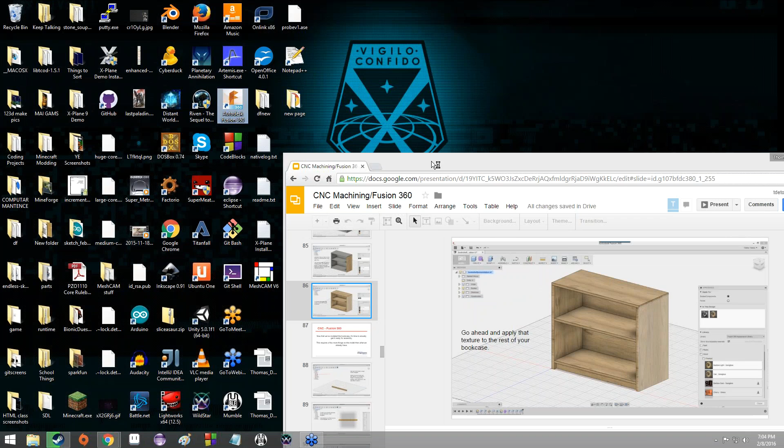Anybody do anything interesting this weekend? Okay. Archery shoot. Nice. I like archery. I'm no good at it, but I like it. I took a couple of classes, and actually a couple of my friends have bows, so we go out shooting sometimes. Robotics competition. Oh, you know how you did? Nice. Congratulations. It wasn't Amazing Mechatronics, was it? Or NCSO, North Carolina Science Olympiad? Only reason I ask is because I was at that. Oh, okay, FIRST Tech Challenge. Oh, yeah. Yeah, I helped out a little bit with that at the community college in Charlotte before I moved out here.

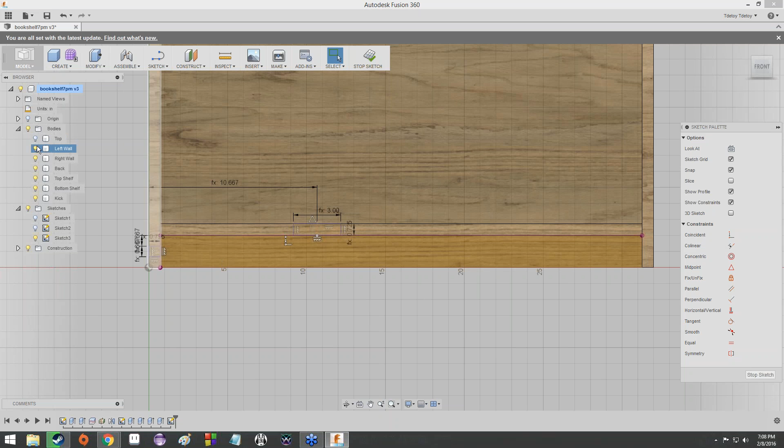Because like we were saying last time, there was a bit of an issue with what we'd had so far, and that is the fact that regardless of whether or not the bookcase looks complete, we don't actually have any means of affixing everything to everything else on the bookcase. In other words, we don't have any holes for screws or anything like that, so what we're doing is we're creating these tabs that we can then use to assemble it all together like a jigsaw puzzle, or you know those flat sheets of metal that have designs punched out on them, and you separate the different parts and you bend them, and then you put together like a model or something.

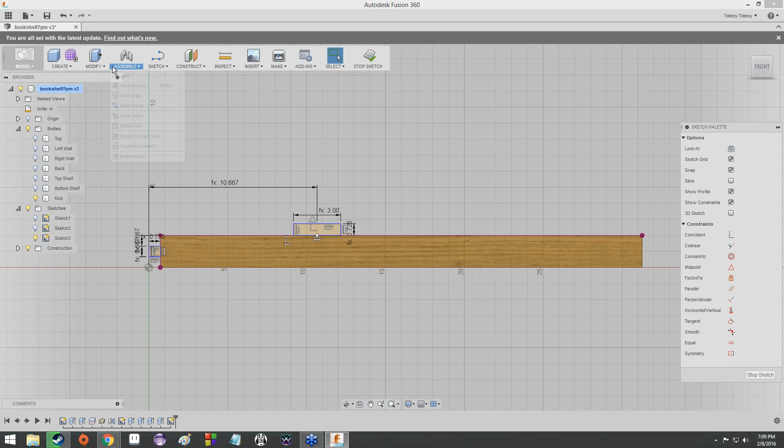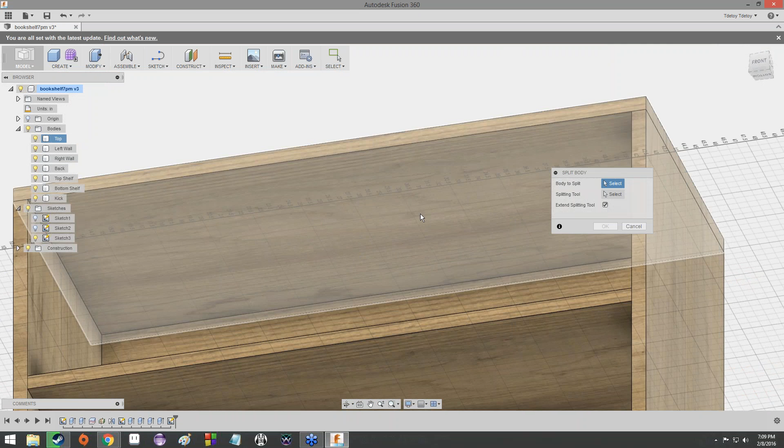Somehow your whole entire bookshelf is one entire body. Ooh, that'll be a little bit more time consuming to fix. It's possible. So what you can do is under Modify, you can split bodies like we were doing in the video. And basically when it asks for planes to split the body along, like the splitting tool, you can select, for instance, let's say you wanted to separate the top from this sidewall here. You could select the bottom face of this top. Let me go ahead and rotate it downwards. If you selected this face here, it would use it as the plane in order to separate these two bodies.

And then you could just do that with all of these. So you would split this sidewall off from the back and the shelves by selecting this face. You would separate this shelf from the back by using the face on the back. You would separate the kick plate from the bottom shelf by using the bottom face on the kick plate or on the shelf. Things like that. Does that make sense? It'll be time consuming, but it will be possible to do.

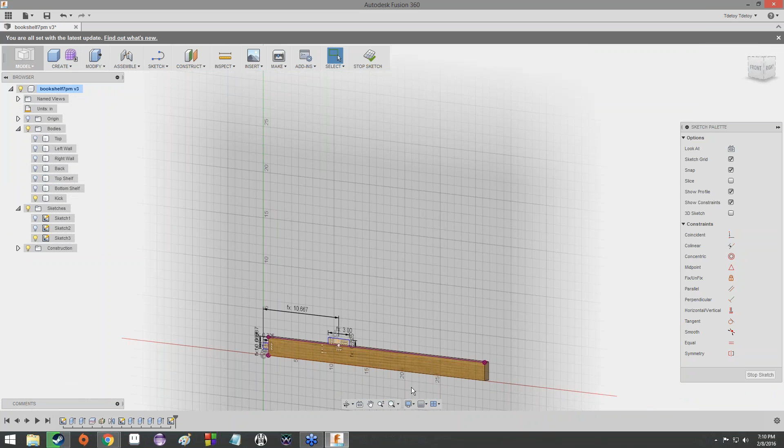Okay. So, in the meantime, though, show of hands for everybody who has their rectangles drawn and dimensioned out like I do here. I don't exactly remember if we managed to get everybody on the same page last time around, so I just wanted to double check. Yeah, that's going to be the tricky thing about this, because you select the body, which would be the entire bookshelf. We'll figure that out piece by piece, but we should be able to get everything separated by the end of class, or after class rather. Okay, we got one hand up, two hands up, three. Raise your hand then if you have the rectangles drawn and you're just missing the dimensions for them.

Okay, raise your hand if you don't have the rectangles drawn at all. Okay, that's okay. No big deal. So in order to get started, this might be a little bit more difficult, Micaiah, since everything's a single body for you. We'll just spend some time after class getting your bookshelf ready and maybe getting you up to this point again, so that you should be good to go for next class.

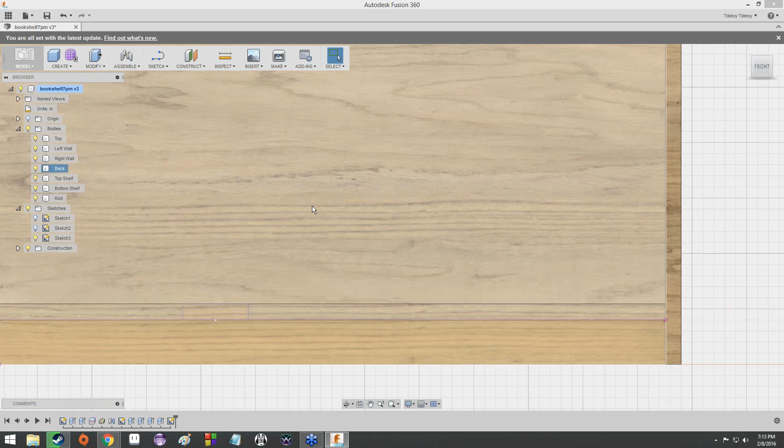So hide everything except for the kick body. So you just have the kick plate right here, which is the bottom front-facing plate. And then you're going to create a sketch on the front face of it.

Once you've created a new sketch, you're just going to create a couple of rectangles. You can just put them arbitrarily anywhere. It doesn't matter where exactly, just as long as there's one on the side and one on the top, because we're going to dimension those properly in a moment. And then just raise your hand once you've gotten the rectangles drawn, then we'll go from there. Okay. We got one hand up.

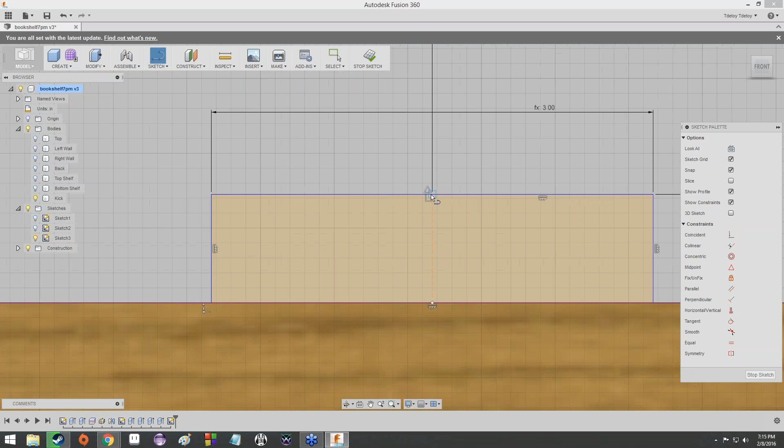All right, so if you have the rectangles drawn, the next thing you're going to want to do is go to Sketch and Line. What we're going to do is sketch a line directly down the center of these rectangles. And the way you can tell you have the center is you see how I've got this triangle right here? Let me zoom in on it. It doesn't make it any bigger. Well, anyway, there's a triangle there.

That triangle means midpoint. Literally the middle of this line right here on the top. So move your cursor around on that top line until you find the midpoint. There should be I think a blue triangle that appears. Find that midpoint, click, and then create a line straight down. Do the same thing over here. Well, actually, no, you don't have to do that over here. You just have to do it along this top one here. So create that midpoint line.

Now that line, when you first draw it, is going to be blue. And it's going to split this up into two rectangles. As you see, if I mouse over this, it's all one rectangle. What we need to do is turn that line into a construction line, so it is not part of the illustration. Like you might have it like this. See, now I've got two rectangles and this blue line going straight down.

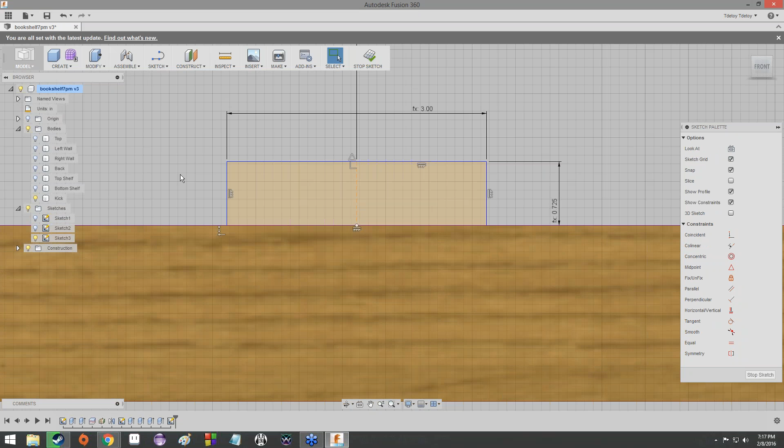If you click on it, though, you'll bring up this little menu on the right-hand side that says Sketch Palette. There's this top option that says Normal/Construction. Click that, and it will turn into an orange dotted line, which means it's a construction line, which is exactly what we want, because we're going to be using it for measurement purposes, and it's not actually going to be a part of the final product.

All right. Now, ideally, you should have two rectangles, one on the side, one on the top. You've got a construction line down the center of the top rectangle, and everything's just kind of sitting in place. Now we got to dimension them. So go back up to Sketch, and then down to Sketch Dimension.

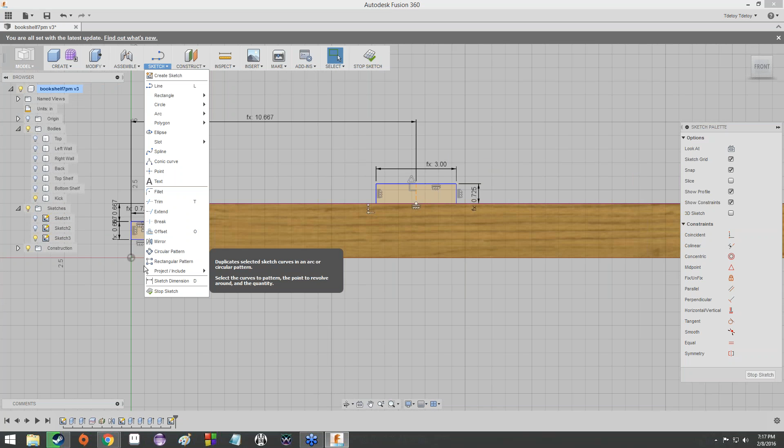So the first thing we're going to do is dimension the width of this side tab. So dimension just this line on the left-hand side right here, the one that I have highlighted. Bring it out, and that dimension is going to be kick divided by 3.

Once you have that done, dimension this top line here. So the top line of the left tab, that's going to be dimensioned with ply. So now we have the width and the length of this side tab, which is great. That's what we want so far. Now we have to get the distance of this side tab from the top of the kick plate.

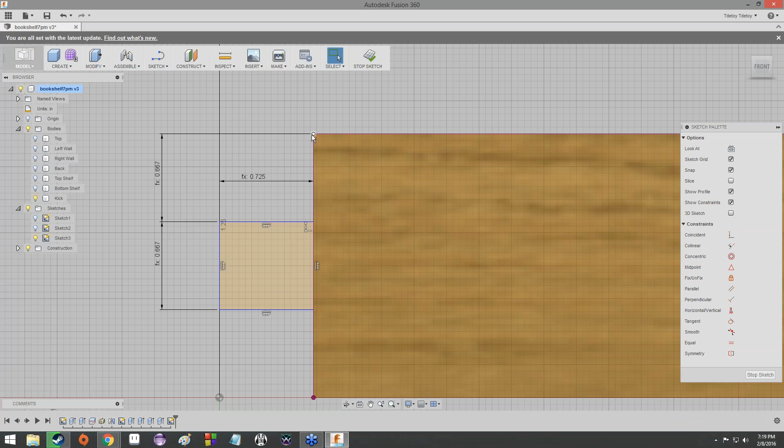So what you can do is, you notice that at the intersection of these two lines, the side line and the top line, if I put my cursor over it at that corner, a dot appears. Click on that dot, and then there should be another dot at the corner of the kick plate. Click on that dot.

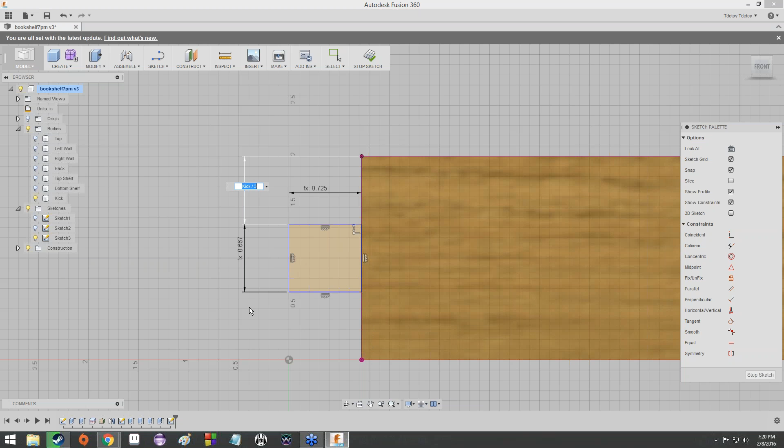So it's going to be the distance from here to here. Then pull it out sideways so that we know it's going to be the vertical distance, not the horizontal distance, because then it'll freak out. Anyway, this distance is also going to be kick divided by 3. So now we've got 1/3 of the height of the kick plate, which is just empty space, 1/3 of the height of the kick plate, which is the tab, and then the remaining third is on the bottom, right here. Because we're dividing it into thirds, so that works out pretty nicely, right? So there we go. That should be the side tab all dimensioned out.

Once that's done, we dimension the top tab. Now the top tab, the length of it, is also going to be ply. Basically how far it sticks out from the top of the kick plate. That's also going to be ply. No surprise there. All of these tabs are going to be ply, with the exception of a couple, but we'll get there. For right now, though, it's going to have a length of ply.

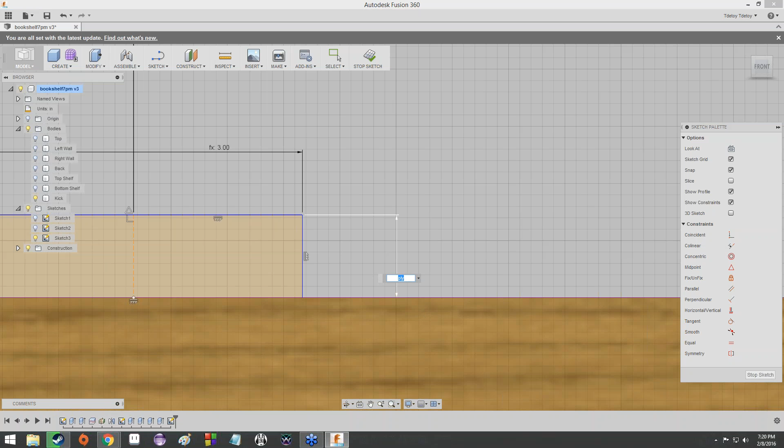And just to clear up any confusion, when I refer to the length of the tab, I refer to the amount that the tab sticks out from whatever it's attached to. So in this case, this way is length on the top tab, and that way is length on the side tab. And then width is going to be the lateral size of the tab. So again, that's going to be the width on the top tab, and then this is going to be the width on the side tab.

It's a little confusing because of the fact that it's relative, but hopefully that'll make sense to you if it doesn't already. You guys are pretty smart though, I think you can pick it up.

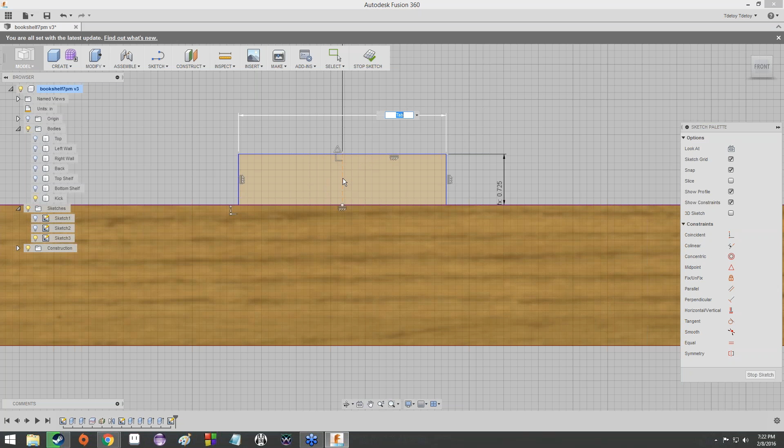So once you've got the length of that tab dimensioned, the width of the tab is going to be tab, conveniently. That's why we created that user preset. Most of the tabs on this bookshelf are going to be a width of tab. And again, because exceptions are fun, there are always going to be a couple of exceptions to the rule, this being one of them. But for now, a pretty safe assumption is that the width of any tab is going to be tab.

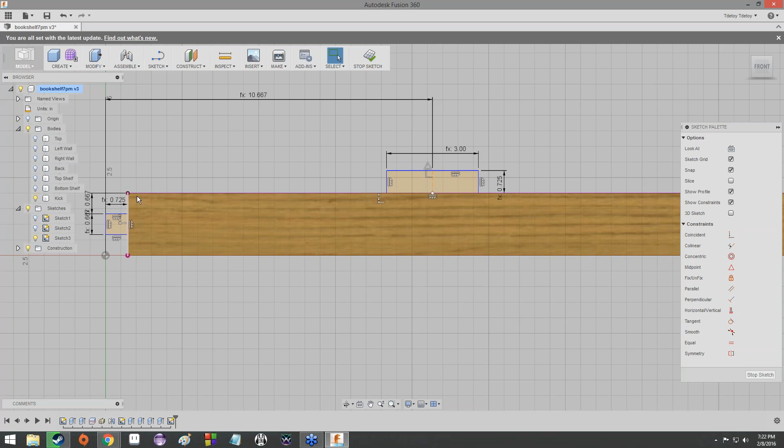Now, that's almost everything. There is one more thing we have to do, though. We have to dimension the distance of this tab to the end of the kick plate. So the distance from here to here. Now, that's not the way we're actually going to distance it. What we're actually going to use is the distance from there to there. So that's why we're using this midpoint construction line, because we're going to use it for sketching a dimension here.

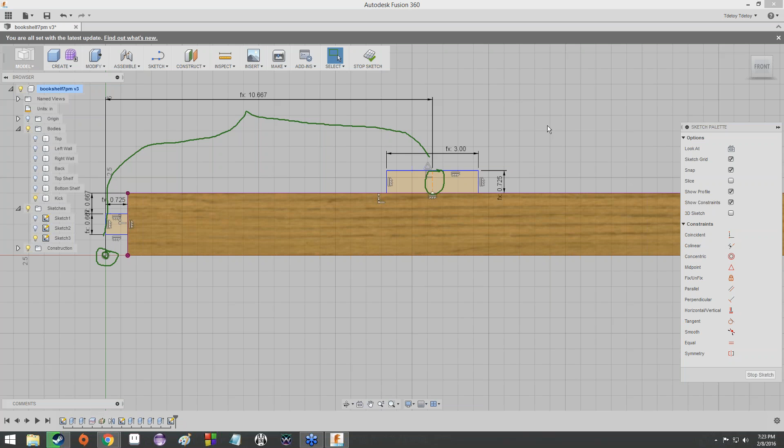So you're going to start at the origin, which as you can see is easily identifiable by its sort of half-filled in circle, or circle filled in by quarters. If you mouse over it, you get a point there. So just go ahead and click on that one, and then you're going to click on the midpoint construction line, which should highlight if it's selectable. So between the midpoint line and the origin, you're going to dimension it width divided by 3. And that should be it. That should be everything you need to dimension for these kickplate tabs.

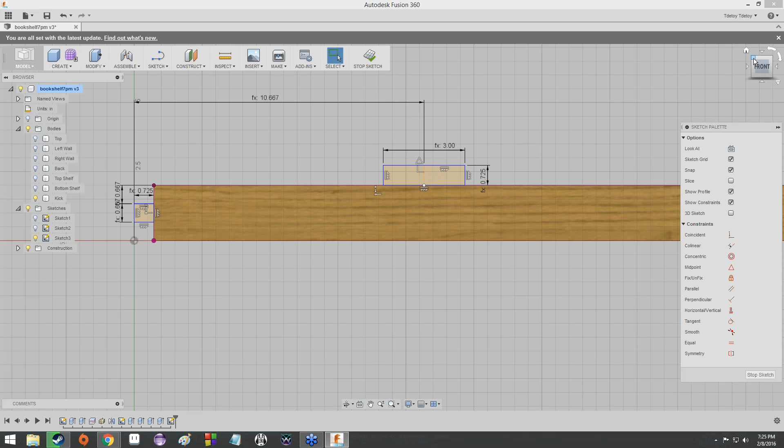So just, again, to get an idea, raise your hand real quick if you're ready to move on to extruding these. Okay, I only got a couple of hands up. All right. Just about everybody. Well, in the interest of keeping things moving, let's go ahead and get started on the extruding. If there's anything you want me to go over again, you can always ask me in the question box. Otherwise, the video will go up on YouTube tonight, so you'll be able to get back up to speed.

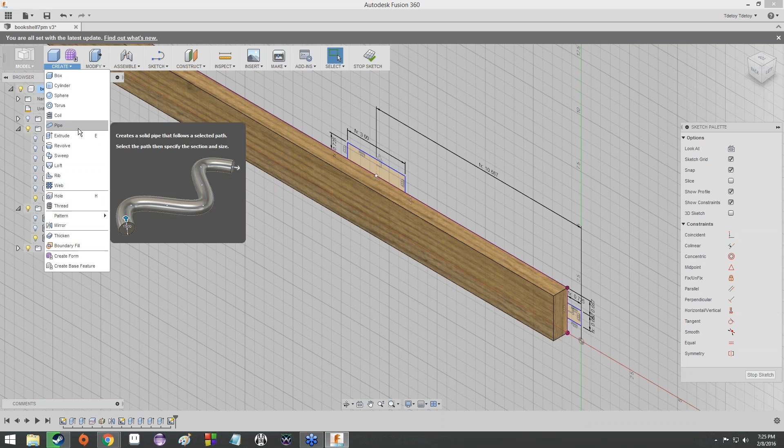All right. So we'll go up to create and then extrude, because that's how we extrude things. And here I am looking at my nice two sketched tabs. And we're going to select both of these because we want to extrude both of them, as one might expect.

So you remember last week when we were creating the shelves and the kick plate and all of that stuff, there was that option to extrude it to a certain distance by selecting To under extents. And that's what we were doing, that's how we would get the shelves extruded to the other side of the bookcase and stuff like that. We would use that particular option.

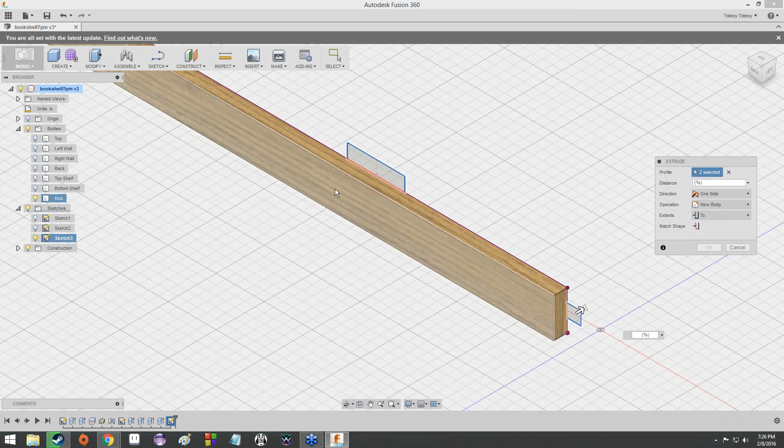We're going to use that again. Now, the nice thing is, To is very good at extrapolating what exactly you mean. So now that we have our sketches selected, we can select To, and then we can just click on this back face of the kick plate. And it will automatically go, okay, so it should go that far, and then it will stop.

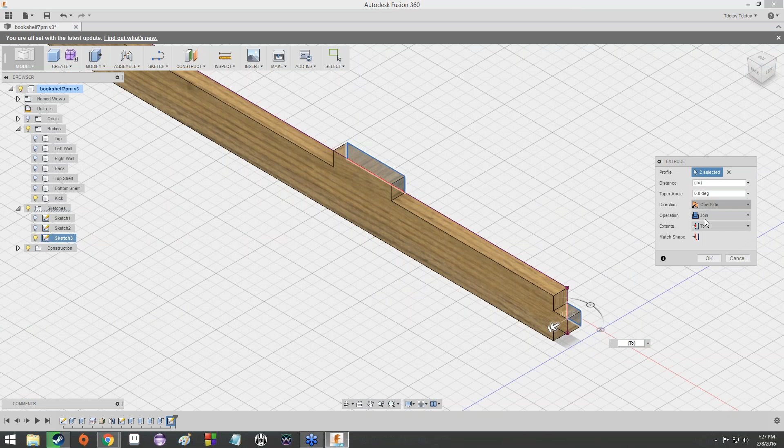So if we look at it from the side, our 2 tabs now are 3-dimensional, which is excellent. That's exactly what we want. And we're going to keep the operation on join for now, because I'm going to show you another way that we can mirror things. Although usually we will select new body like we have before. So we'll keep it on join, and we'll hit OK. And look at that, tabs. Wow.

Although it seems kind of weird that our tabs are really only on one side. So what do you think we're going to do? Many ideas. I'll give you a hint. We used it last week.

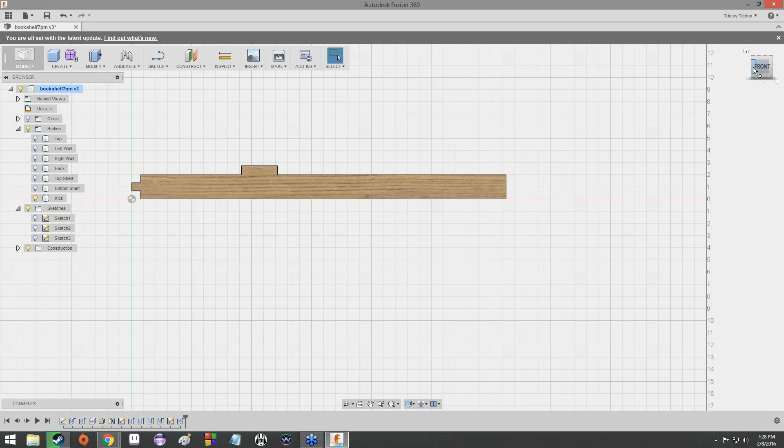Okay, well, we're going to use mirror. We're going to be mirroring these tabs over onto the other side, because it seems kind of like a waste to have to redraw all those things again when we can just have the computer do all the heavy lifting for us. So under Create, down here there's this option called Mirror, which again we used last week, but we meet once a week, it's not necessarily going to be fresh in your head. So go ahead and select Mirror.

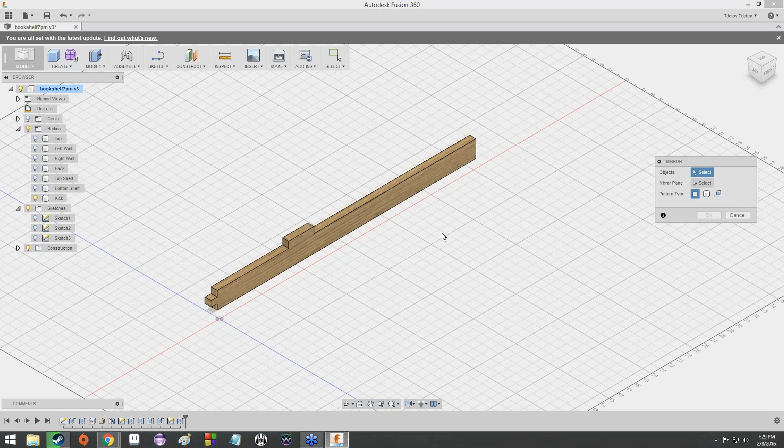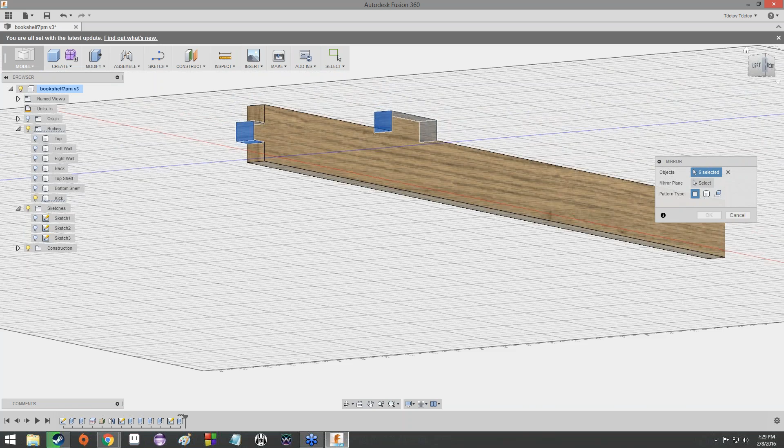So first things first, we select the objects that are going to be mirrored. If we get on to pattern type, we notice that pattern faces is selected, which is excellent. We want pattern faces to be selected. And then we're just going to go through and select the faces on these tabs, not the front and back faces, because those are joined to the entire kick plate. Fusion will be able to extrapolate on those two sides and update the front and back faces in order to reflect that. So I've got the side faces and the top face selected on each of these tabs.

Pretty exciting, I know. And then we're going to have to select a mirror plane. Well, if you remember from last week, we had the foresight to create a midplane when we were mirroring the left and right walls, right? So we're going to use this construction midplane as our reflection plane. So you can either just click on it here in the browser, or you can click on it so you can view it and then select it there.

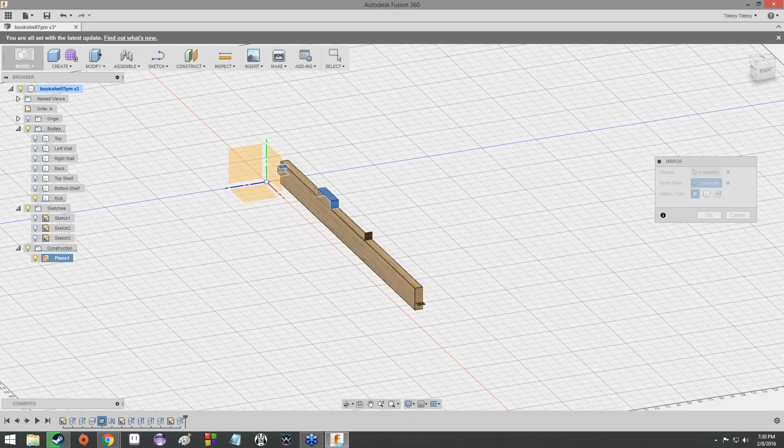Anyway, I've got kind of this weird preview here where there are only a couple of faces showing. That's okay. Fusion 360, when you use faces like this for reflection, it's not exactly the best at giving you a preview. So it's just going to look funky, but that's not a huge deal. If you hit OK, the tabs should appear. And then we'll have a fully tabbed... undo. If anything like that happens, usually the best thing to do is just hit Control-Z and undo it.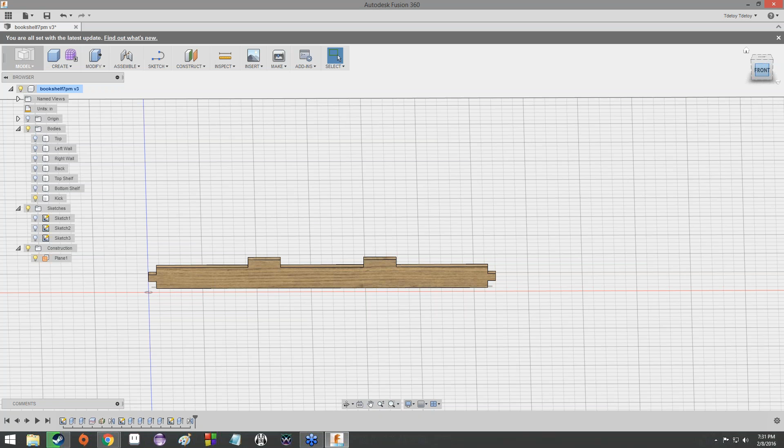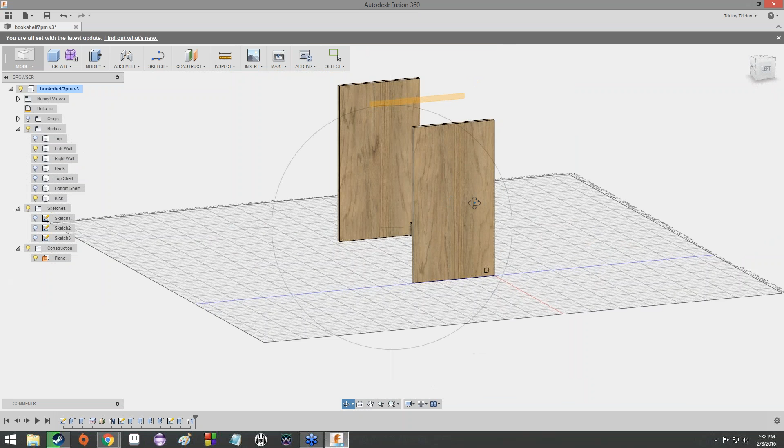Oh, you mean you deleted your midplane? Is that what you're saying? Well, okay. So if it's actually the midplane that you deleted, you can just bring back the left and right walls. Go to Construct and Midplane. Once you click that, then you can click the outside walls of the side walls. So this wall, and then this wall, and it should generate a new midplane for you that you can use.

But if any of you guys happen to delete that midplane, go ahead and bring it back, because we're actually going to be using that midplane a fair amount in the upcoming days. So that you can replicate the tabs on both sides easily, because we're all about making our own lives easier. I mean, that's really the whole point of engineering when you get right down to it, increasing quality of life and making it easier.

Hopefully you guys should have your kick plate tabbed, or at least close to it.

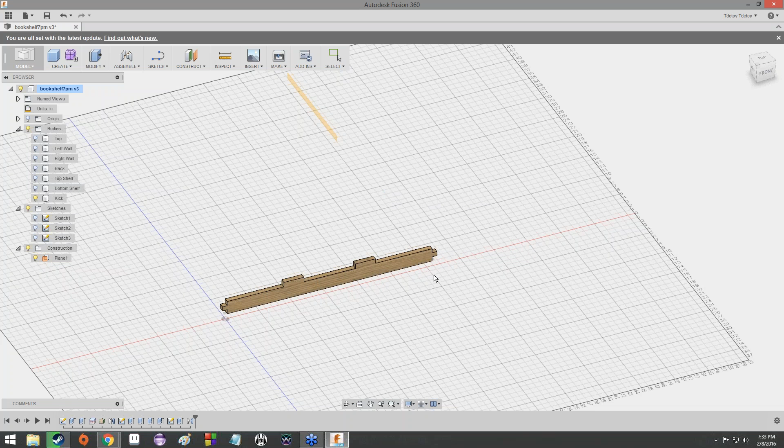Now we're going to tab the bottom shelf. Exciting, I know—try and hold your enthusiasm for the end, though. Let me go ahead and bring that up. Just make sure... make the bottom shelf visible. Part of this is just me talking to myself because I want to see the dimensions. I don't remember them off the top of my head.

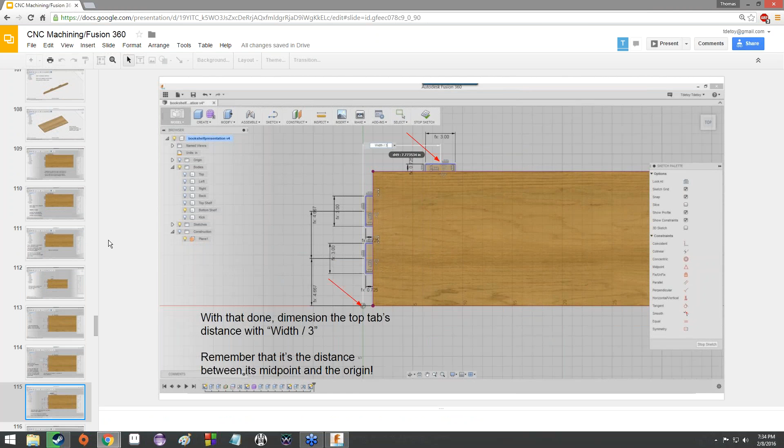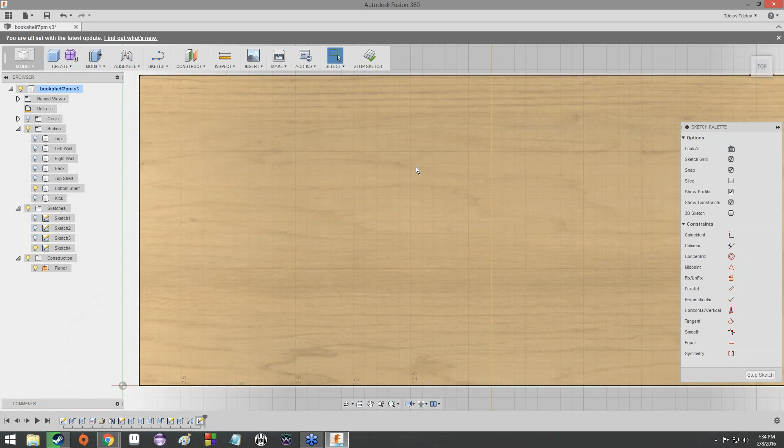Okay, so now that we've got our bottom shelf visible, we're going to go up to Sketch and then Create Sketch on the top plane of the bottom shelf. Let me just verify—yep, I got top on my cube up here. We're looking at the top of the bottom shelf right now.

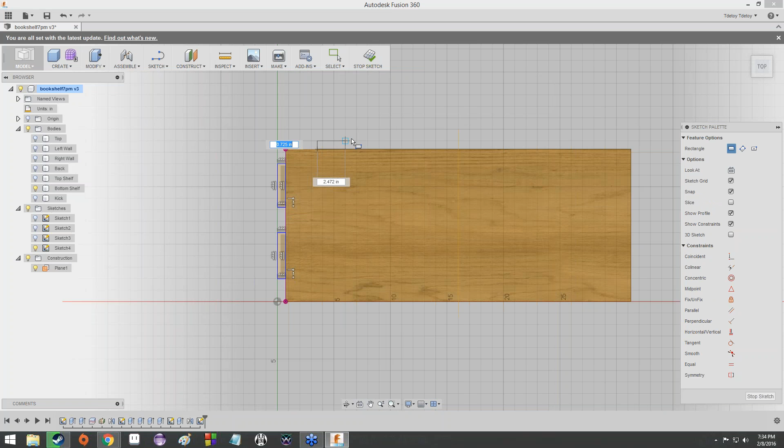Then go back to Sketch, and we're going to create 3 rectangles. As always, don't worry about dimensions too much—we're going to fix that in a moment with the sketch dimension, but we've got to have the rectangles first before we can do anything with them. So here we've got 2 on the side and 1 on the top.

Once we have those sketched, we're going to sketch the midpoint lines again, except this time on all 3 tabs. So once again, find your midpoint as denoted by the light blue triangle when you mouse over the middle of the top sketch line. Bring it straight down, and then just repeat that process for these other 2.

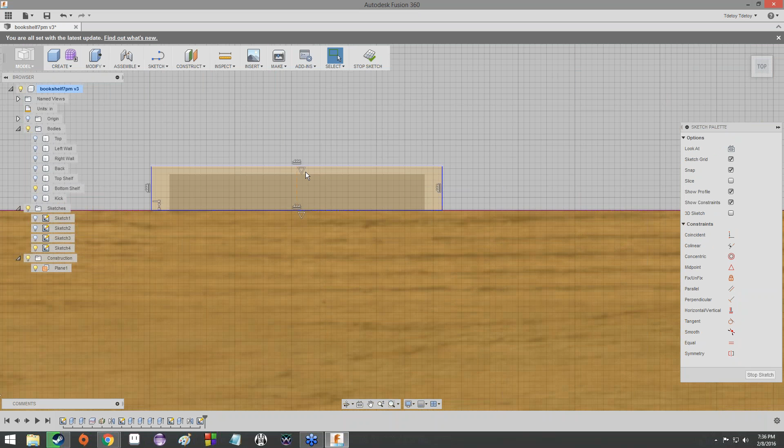So now we've got our 3 lines. Now we just need to make those construction lines. If you hold down Shift and click on each one, it will select all 3, and then over here in the sketch palette, you can make them construction. And hey, look at that—we've now got 3 construction lines. I don't know why that triangle is upside down, but whatever.

So now we've got our—oh, there's a shadow being cast by the sketch, that's confusing. Now we've got our 3 rectangles ready to be dimensioned.

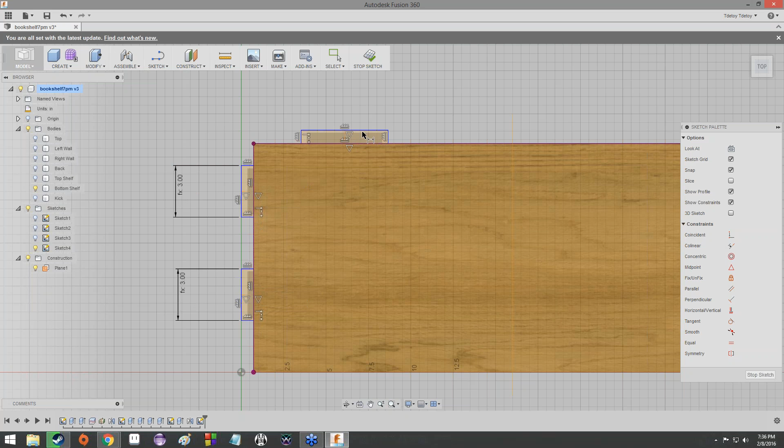So once again, sketch dimension. Dimension this—the width of this bottom tab is going to be tab. Same with this tab. Same with this tab. All right, so now we've got the width of all 3 tabs.

Now we're going to do the length. Ply, and ply. Perfect. Now we've got the size of the tabs down.

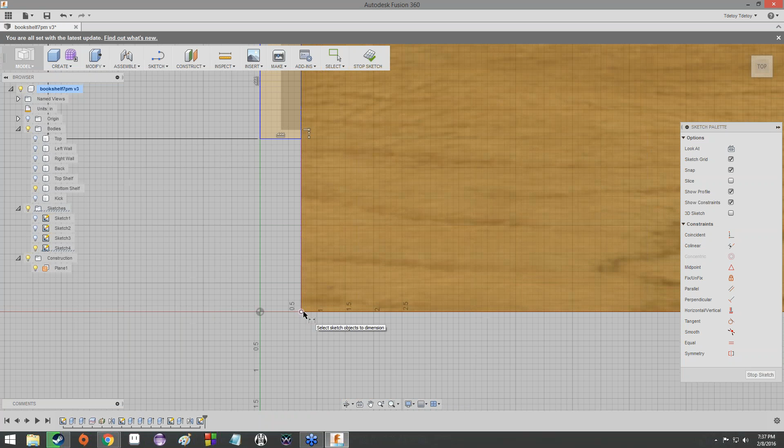We just have to do their placement. So now we're going to use this midpoint line, and we're going to do the distance between this midpoint line and this bottom point right here. Again, notice how I mouse over it and I get a white dot—sometimes it'll be a different color, but generally it's a white dot. Bring it out horizontally. This is going to be depth divided by 3, because again, we're looking at it top down, right? So this is going to be the front of the bookshelf, and this is going to be the back.

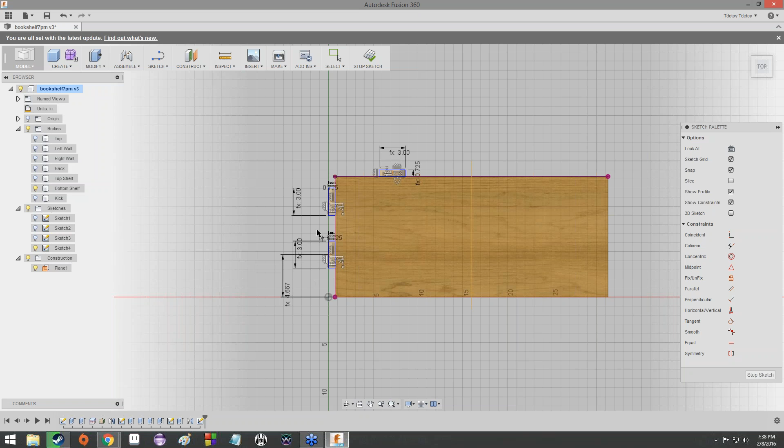So this whole dimension right here is going to be the depth of the bookshelf. So we want to make sure that this distance right here is exactly 1/3, well, or as close to 1/3 as we can get of the depth. Boom—it's actually pretty close to the proper measurements on these. I know this one's going to mess up a little bit. So far, so good, right?

Now we're going to use the distance between the midpoint line there and the midpoint line here. Bring it out a little bit, and again, depth divided by 3. And that should rein in this side tab a little bit.

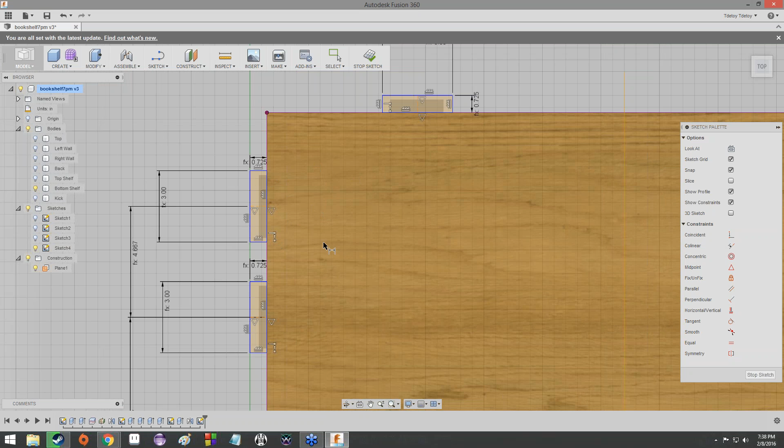So now we've got tab for the width, ply for the length, and then depth divided by 3 for the distance between each of them and the distance between the frontmost side tab and the front of the bookcase, if that made sense.

Now we're going to dimension between this midpoint line—so I'm going to click that so it's selected—and then come down and select the origin. Then just draw the dimension up, click, and we're going to make this width divided by 3. Hey, look at that. So now we've got our 3 tabs.

I bet, based on the kick plate, you know where we're going with this. What do you think is going to be next? And then what's after that?

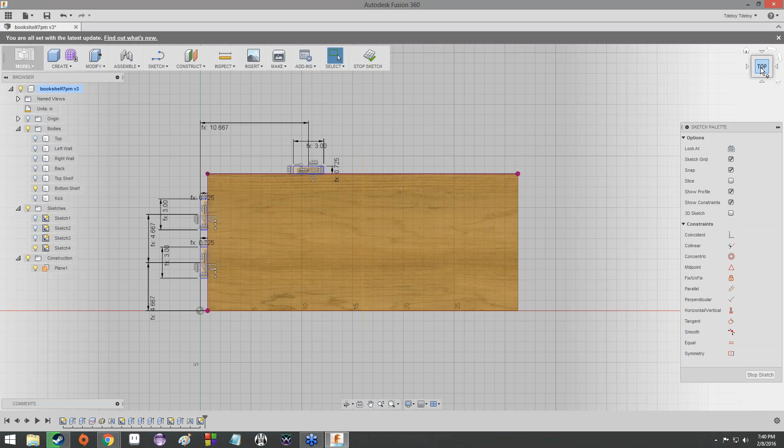Yes, no, maybe? Okay, well, we're going to extrude it now. So I'll go ahead and rotate this round. Spin it round, right round. Okay.

So now we've got our 3 little drawings. Click, click, and a click to select all 3 of them. They're all blue now. So far, so good.

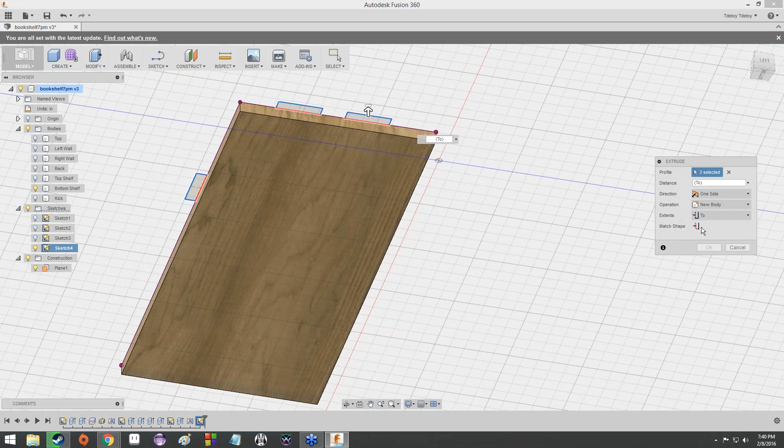We're going to use To for the extents and click right there. Now, before you hit OK, we're actually not going to join these—we're going to use new body. And the reason we're going to use new body is, well, you'll see in a minute. But we're going to use new body so that we've got these all nice and separated. You can see that there's the line right here denoting that they're a separate body. So hit OK.

You can also see that they're a different color. They're a different color because they're a new body—they don't have the same appearance as the shelf, which makes it easy for us because then we can easily tell whether or not they're a new body.

So now what? What do you guys think? I'm determined to get an answer out of you guys at some point here. I'm just going to keep asking, now what? Stubborn, dang it.

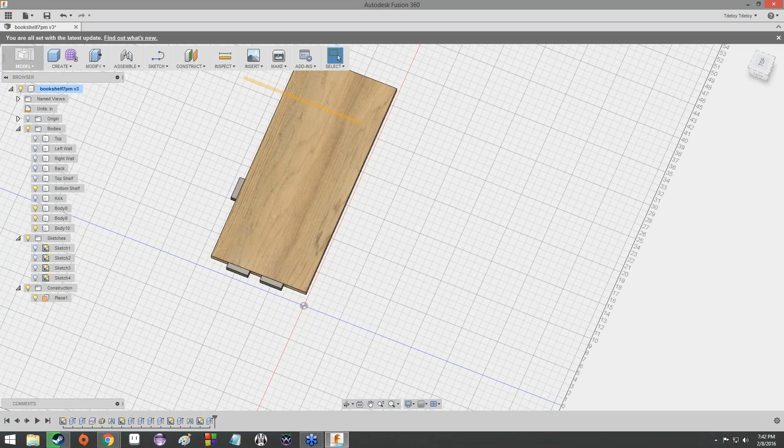All right, we're going to mirror these. What are the dimensions for the tabs? Let me go ahead and bring this sketch back up real quick.

The width of all of these tabs is going to be tab, which is a user preset that you guys made in the very beginning. They should all be tab, which also corresponds to 3 inches, but it's generally easier to type in tab. It's also a good habit to get into. The length of all these tabs is going to be ply, so the distance from the bookshelf to the end of the tab is going to be ply. So far we've got tab and we've got ply.

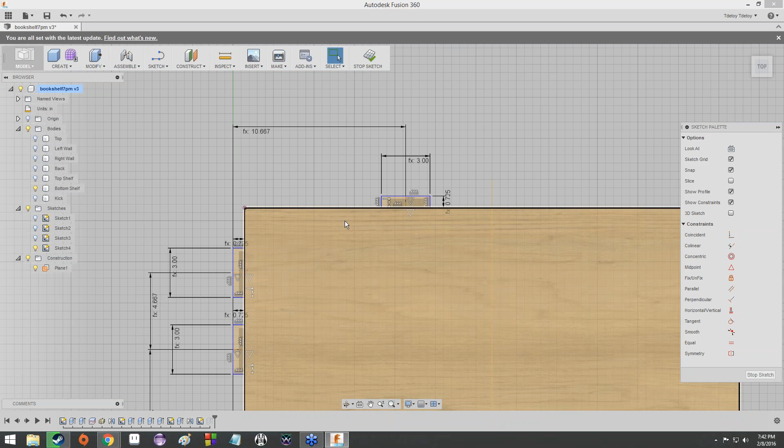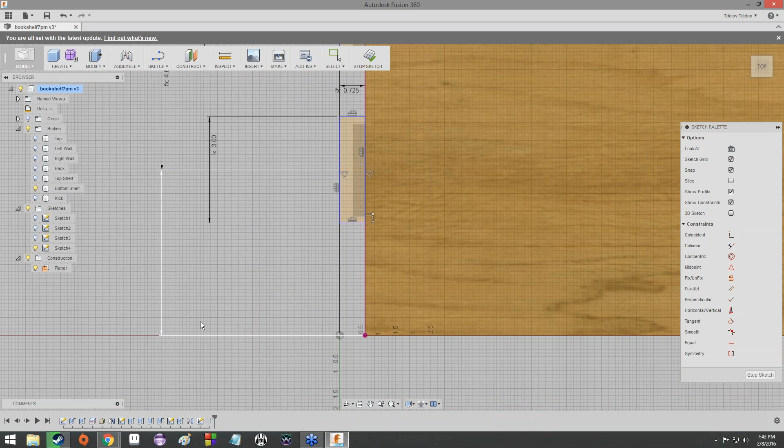Now, the distance between the front of the bookshelf and the midpoint line on this side tab is going to be depth divided by 3. Same deal up here: the distance between this midpoint line and this midpoint line is also going to be depth divided by 3. And that's all you need for these side tabs.

There's one more dimension needed for the top tab, though. It's going to be the distance between the origin and the midpoint line on the top tab - that back tab technically, but whatever. That one is going to be width divided by 3. So you're going to have the back tab move out a little bit, maybe if you're like me and you draw it way too close to the edge. But those are all the dimensions you need for those tabs.

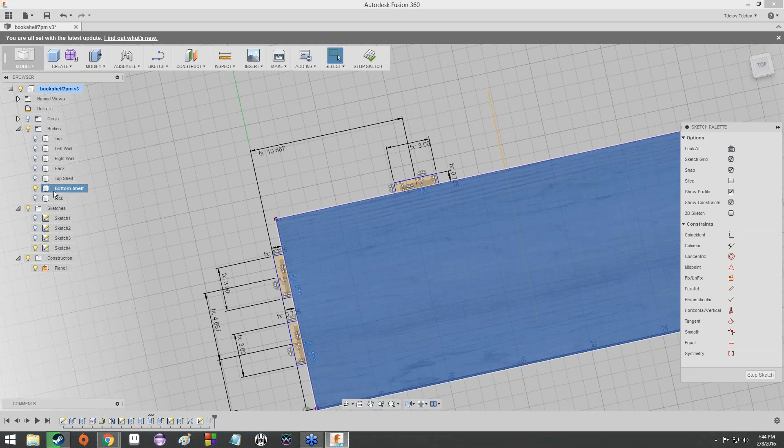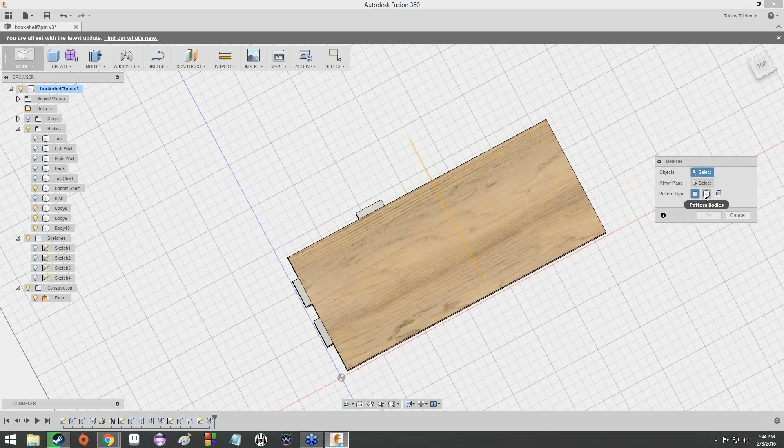So now, once you extrude those, you should have your newly extruded separate bodies from the shelf. We're going to go ahead and mirror those. Under pattern type, we're going to want to select pattern bodies, and then just select each of these tabs.

No, just a trick of the eyes. Select each of these tabs, and then for mirror plane, again, we're going to use that midplane. Now you should see a preview of it reflected on the other side. Hit OK, and boom.

Now we've got 6 tabs on that shelf. Now we have to create another 6 tabs on the top shelf. But it's a lot of work. There's an easier way to do it. What do you guys think that is?

What do you think we can do to make our lives easier? If it helps at all, I can tell you that it's something we've used several times already. In fact, we just used it. That's pretty much a dead giveaway right there.

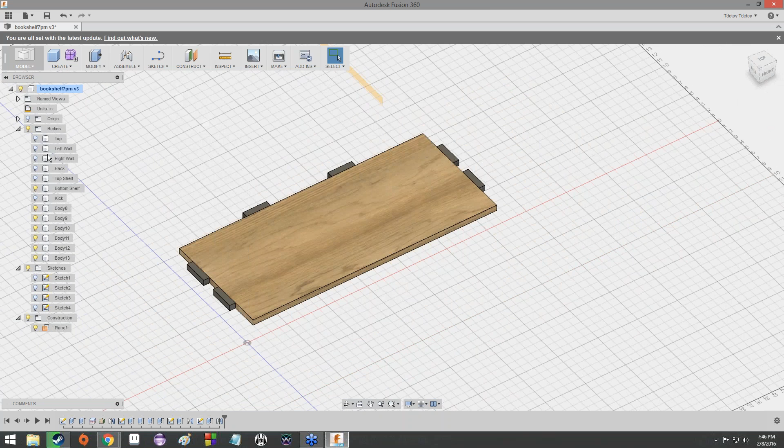Yeah, more mirrors. Exactly. Okay, but we need to create a plane for us to mirror with. So let's go ahead and do that. I'm going to go ahead and show the top shelf also.

So now we've got the top shelves kind of floating above the bottom shelf in this strange sort of magical view. I don't know, I started that sentence with no idea how to finish it.

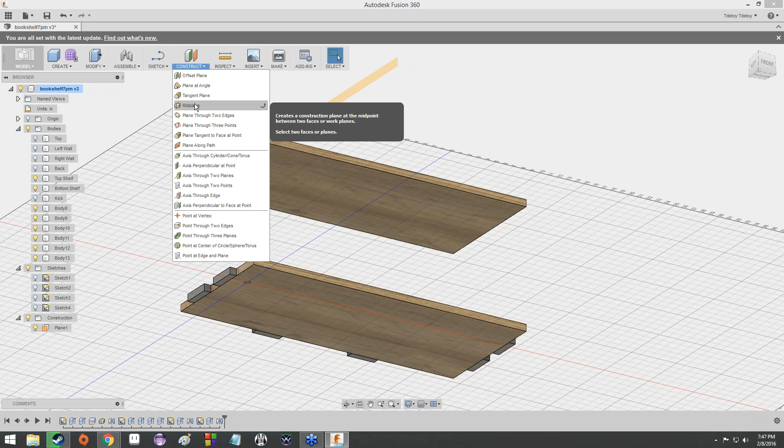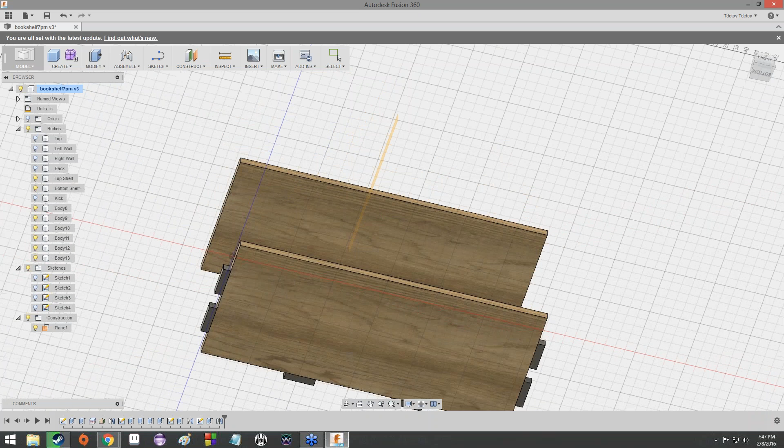Then we're going to go to construct, and then midplane, just like we did for this one up here. Now you can either select the bottom face here and the top face here, or if you're so inclined, select the top face here and the bottom face here. Regardless, whichever you go with, it either has to be the inside facing faces or the outside facing faces.

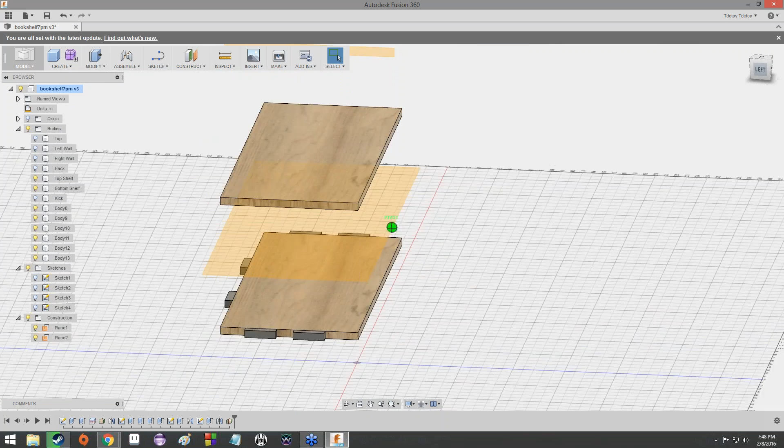I'm going to go ahead and use the inside one. So I'm going to select the top face of the bottom shelf and the bottom face of the top shelf. Boom, and then a midplane appears. Look at that - it is floating exactly in between the two shelves like some kind of magical cheese sandwich. Don't know, kind of looks like cheese. Transparent cheese. Anyway, so now we've got our magical cheese sandwich here.

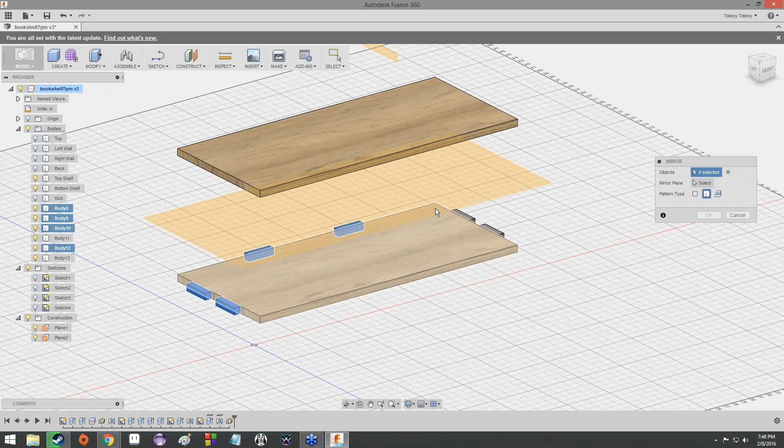We're going to mirror again. So create, mirror, make sure that pattern bodies is selected. Now that we have 6 tabs that are ready to be mirrored, we're going to select all of these tabs. And then for mirror plane, select the midplane that you just created. And then you should see a preview.

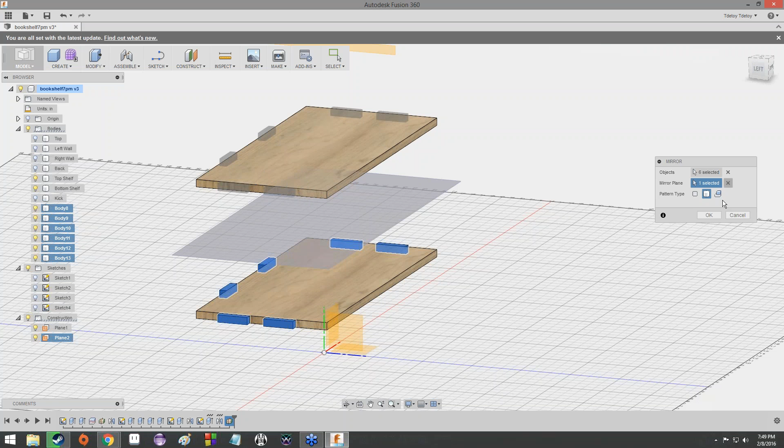Unsurprisingly, Fusion is pretty consistent with that sort of thing. It should be, you know, lined up with the top shelf. If they seem off, double check to make sure that your midplane is actually in the middle, because if you selected the top of both of these, the tabs would probably be floating a little bit above the top shelf if you tried to mirror it there. But anyway, there we go - now we've got those objects mirrored.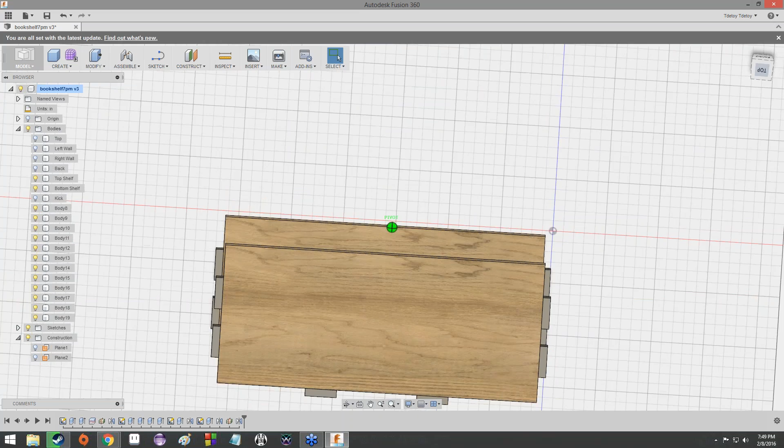I'm going to go ahead and hide the construction plane so everything looks a little more cleaned up. And now I'm going to do another thing. I'm actually going to combine the tabs into their respective shelves, so they all become one body.

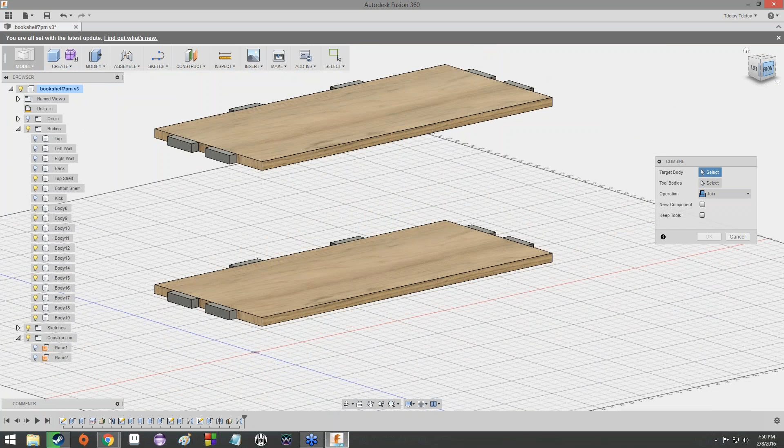So if we go to Modify - I swear I know these things, I just keep forgetting them - we go to Modify and then Combine. You get this menu that comes up: target body and tool bodies, operation, blah blah blah. We actually used this a little bit last week for something, I just can't remember it right now.

All right, so for target body we're going to select the main shelf body. Hey, look at that, now the whole thing's selected. Now for tool bodies, select each of the tabs. You don't have to hold down Shift, you can just click them and it will keep selecting them. So in the end we should have everything selected, just for the bottom shelf.

We're going to repeat this process for the top shelf, but we want to make sure we just do this for each shelf individually. So the shelf and all the tabs are selected for the bottom shelf. Operation join, hit OK, and look at that - they're now all one body, and they get the appearance of that main body.

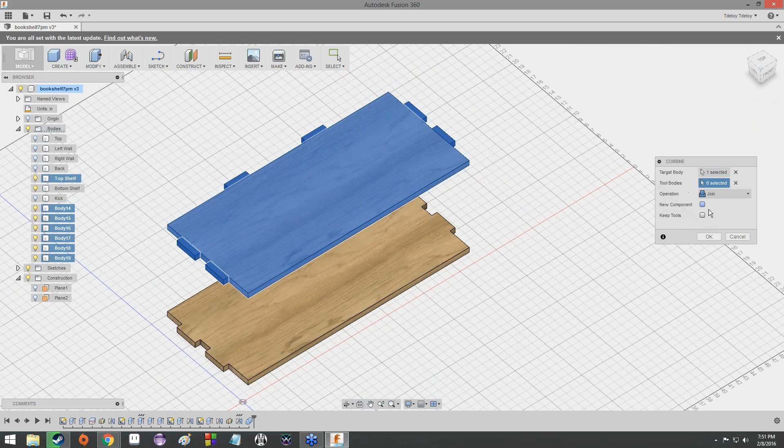Awesome, let's do that again with the top shelf. Select the top shelf as the target body, select the tabs as your tool bodies, make sure operation is on join, hit OK. Boom. So now if we try and hide one of these shelves, the tabs go along with it - it's all one body.

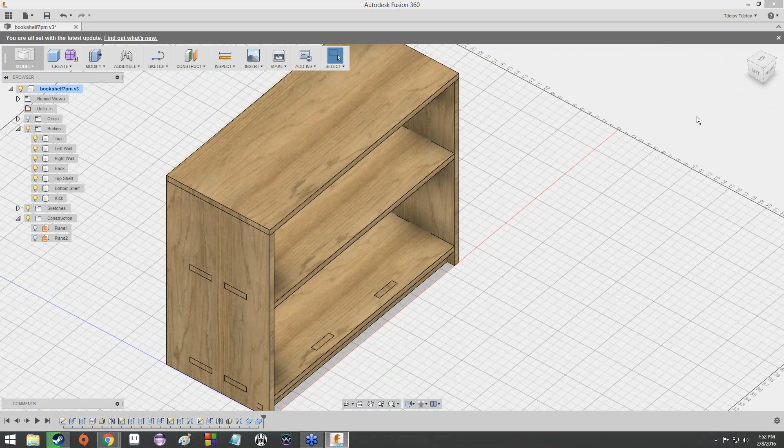And if we take a look at this so far, you'll notice that the shelf is looking a little bit more detailed, because the other parts haven't been cut out of the shelf yet, but we'll get there. So far we have our top and bottom shelves, and we have our kick plate all tabbed up.

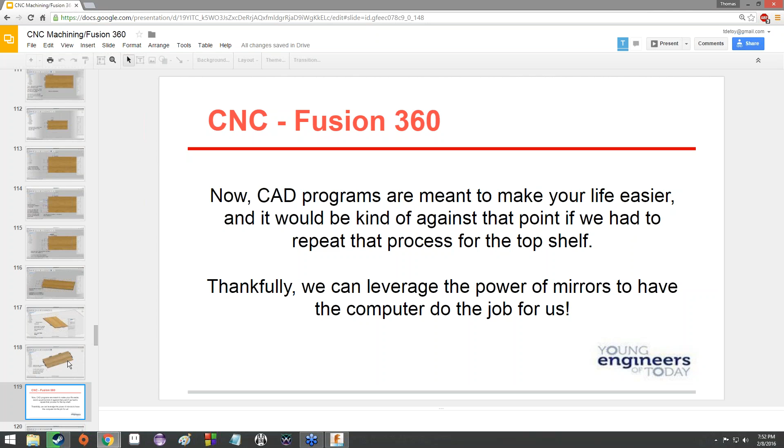But it's not enough, there's more that we have to tab. Hey, look, we were just doing this, this looks familiar. Let's do the back now - let's at least get the back started so we can continue working on this on Wednesday.

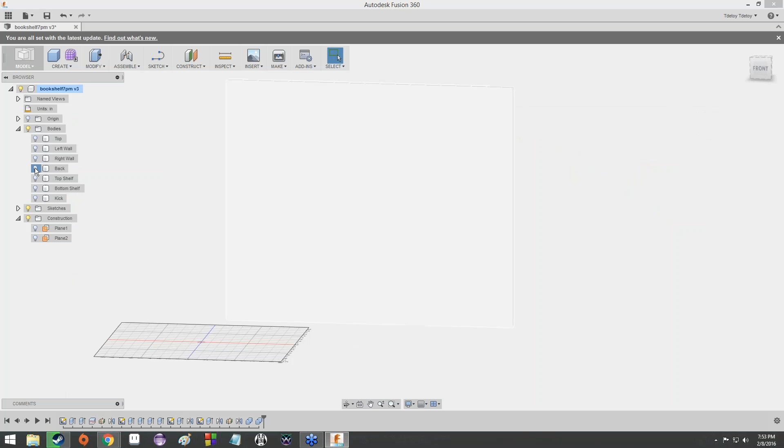So I'll show the back. Here's the back, just sitting up there without a care in the world. We're about to tab it. Notice how I'm starting the sketch on the back of the back.

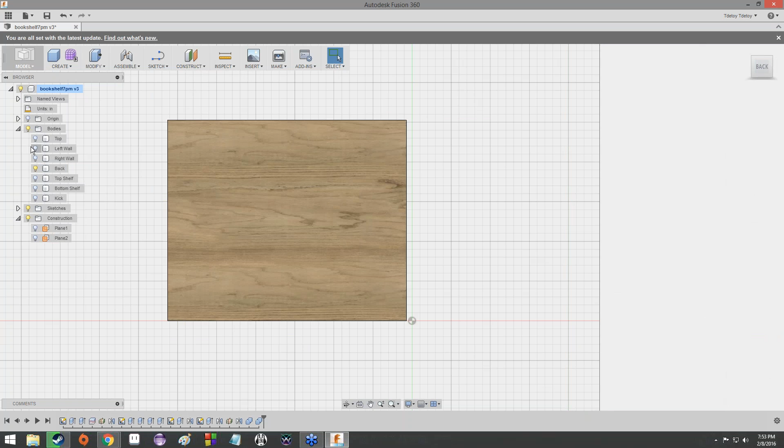In order to give you guys a better idea of what you're looking at, this is the back of the bookshelf - we're looking at the back of the back. I can repeat myself a couple more times, I'm sure it's never old to hear. Anyway, create a sketch on this back plane.

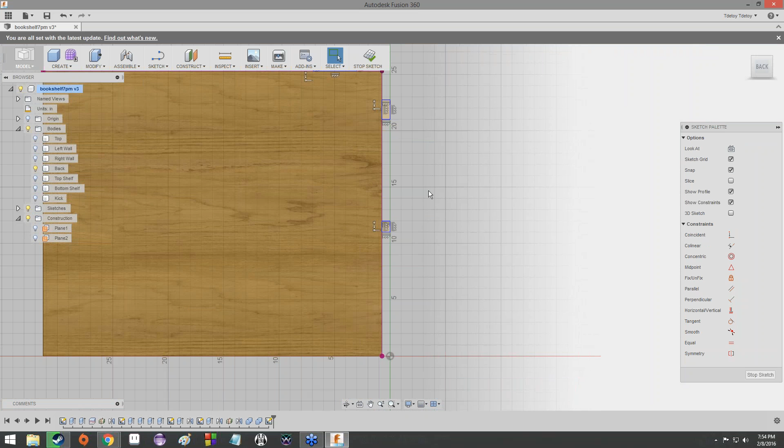And then create, once again, 3 rectangles. Is it just 3? Yeah, it's just 3. Okay, cool. And these are way off dimension-wise, they're going to be way bigger than this, more spread out. But whatever, again it doesn't matter.

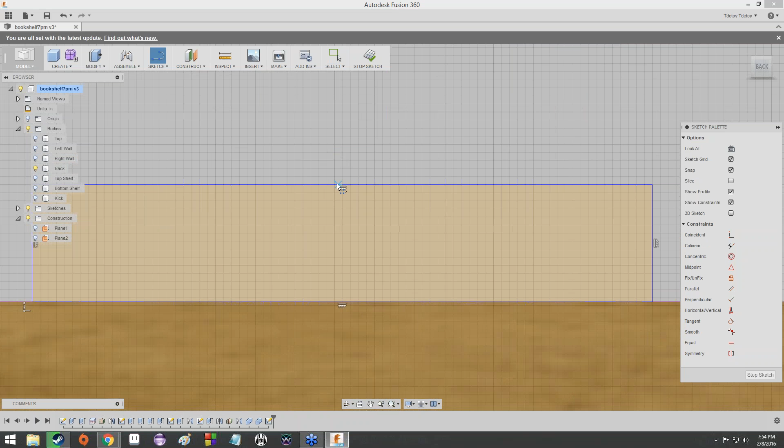And yeah, let's create the midpoint lines and then we'll call it a class. So in case you don't remember: sketch, then line, then find the midpoint. Boom. Same deal down here, find the midpoint. Boom. And finally, find the midpoint, and then boom.

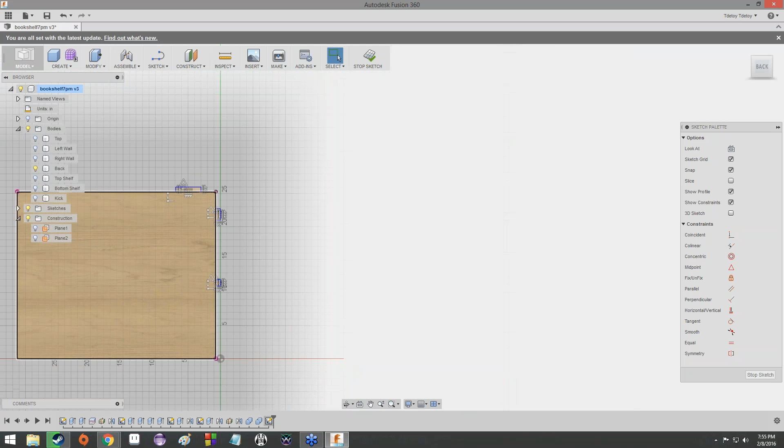So now we're going to select all of these, hold down Shift and click, and then click on Normal/Construction, and they all become construction lines. So now it's ready to dimension on Wednesday, and we'll get this looking like it should, and we'll probably get the last of the bookshelf modeling done, then start getting it ready for CNC work. That should be pretty cool.

You'll get to see the full process from start to finish of how we can make something in Fusion, and then not only make it, but get it set up and ready to go so it can resemble the object it's going to be cut out of, so that we can assemble it. You'll see what I mean.